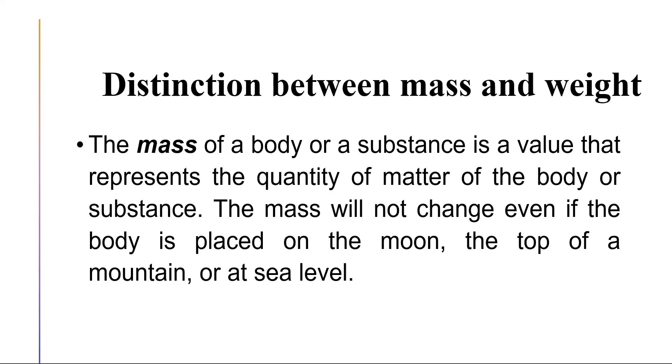The force exerted by this mass when it is subject to the Earth's gravitational attraction is the weight of the body or substance. Since gravitational attraction is variable, it is lower at high altitudes than at sea level. The moon's gravitational attraction is weaker than the Earth's, etc. The weight of a body or a substance will vary according to its location, but its mass will always remain the same.

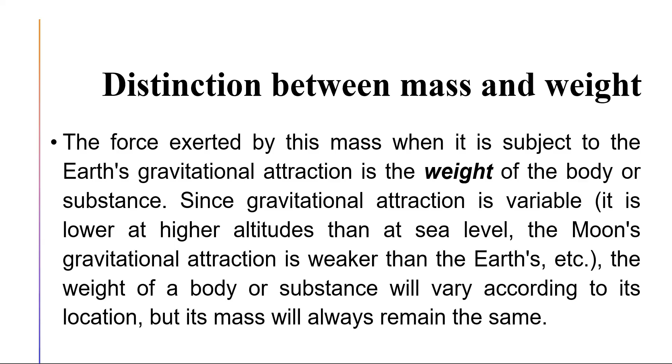The gravitational acceleration of the Earth is approximately 9.81 meters per square second. So weight on Earth is equal to mass times the gravitational acceleration. The unit for weight is supposed to be newtons, or equivalently kilograms meter per square second. But it is often shortened as kilogram, and gravitational attraction is considered as a unit 1.

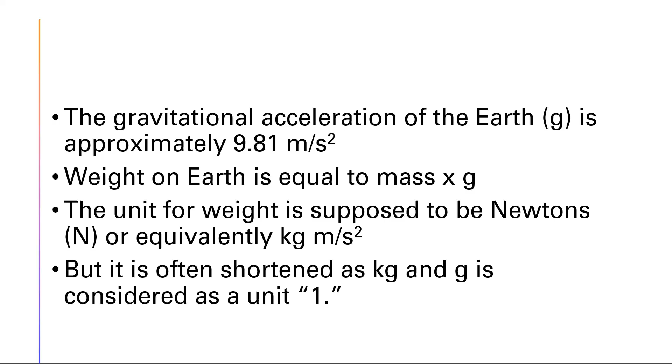That's why on Earth, in non-scientific fields, for example maritime, we consider that 1 kilogram of mass is equal to 1 kilogram of weight. But it is supposed to be 1 kilogram of mass is 9.81 newtons because of the acceleration.

Okay, the formula density is equal to mass over volume. We will use that even on board, not only here in school. And then you can transpose by cross multiplying it. Then it will be density over 1 is equal mass over volume.

Mass is equal, mass times 1 is equal density times volume. Then if we want to find the volume, then we just transpose the formula. Density times volume is equal mass. And then multiply both sides by 1 over density to cancel here, 1 over density. So your volume now is equal to mass over density. So that is how you transpose the formula.

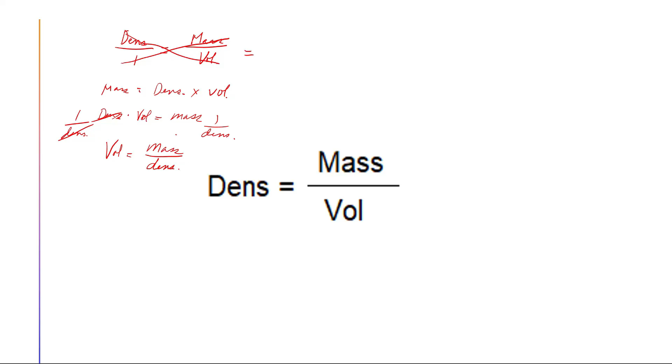Okay, the effect on box-shaped vessels. New mass of water displaced is equal old mass of water displaced. Thus, remember that the mass is equal to volume times density. So the new volume times new density, that is equal to the new mass. Then old volume times old density, that is equal to the old mass.

Then we can derive the new volume over old volume equals old density over new density. So just multiply both sides by 1 over new density, 1 over new density. Then we can cancel. So new volume is equal to old volume times old density over new density.

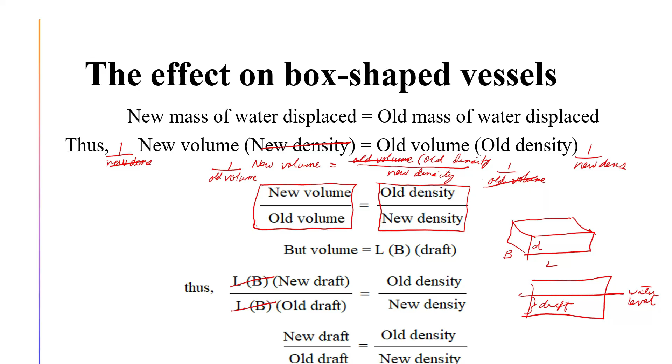Okay, example 1. A box-shaped vessel floats at a mean draft of 2.1 meters in dock water of density 1020 kilograms per cubic meter. Find the mean draft for the same mass displacement in salt water of density 1025 kilograms per cubic meter. So solution, we will use the new draft over old draft is equal to old density over new density.

So you can also use the mnemonic NUN for this. Nun meaning new draft over old draft is equal old density over new density.

Then by transposition or cross multiplication, to transpose, then new draft times new density is equal to old density times old draft. Then multiply both sides by 1 over new density.

Note that the center of buoyancy is the geometric center of the underwater volume, and for a box-shaped vessel it must be at half draft. If this is your vessel and this is the water level, this is your draft. If you draw a line from corner to corner of the submerged portion, the middle will be the center of buoyancy. So remember, KB, the distance from keel to the center of buoyancy, is 1/2 of draft. This is for box-shaped vessels only.

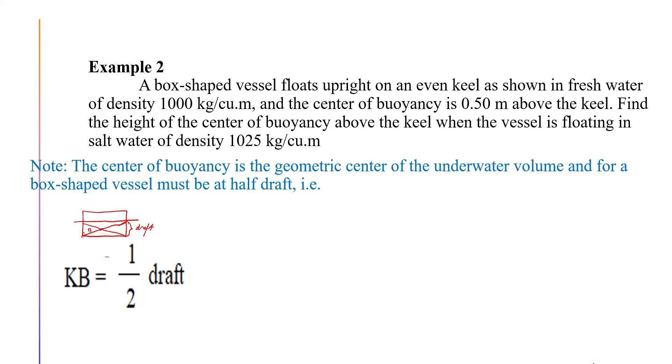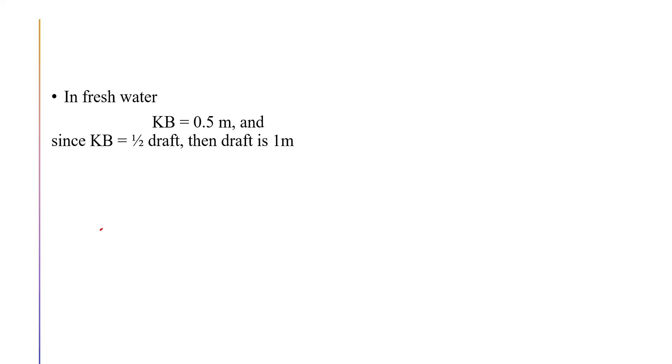In freshwater, KB is 0.5 meters. Since KB is 1/2 of draft, then draft is 1 meter. Going back to the figure, if this is 0.5 meters plus another 0.5 meters, that is 1 meter.

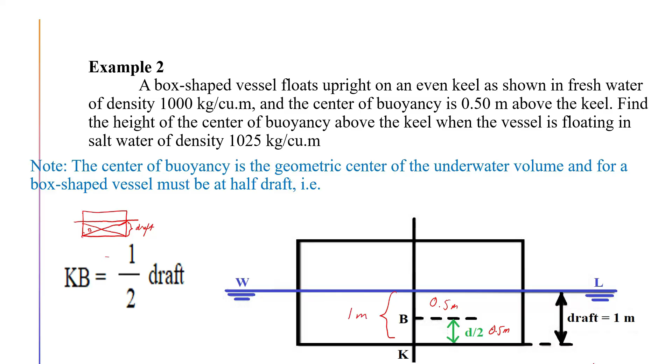Then we apply again the formula: new draft over old draft equals old density over new density. By transposition, new draft becomes old density times old draft divided by new density, because we are looking for the new draft.

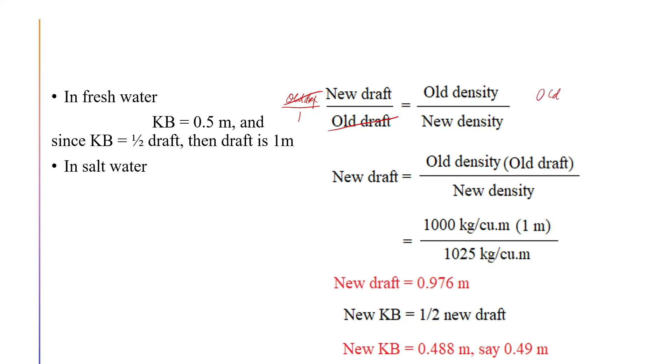There is also a shorter way to transpose this. You can multiply both sides by old draft over 1 so we can cancel, then old draft over 1: 1000 kilograms times 1, divided by 1025, equals 0.976 rounded off.

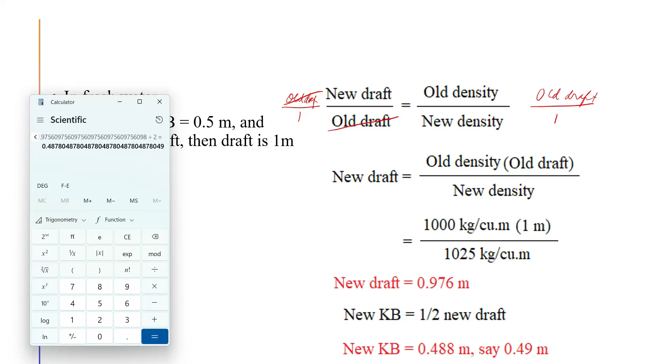Since KB is equal to 1/2 of new draft, the new KB will be just this divided by 2. That is 0.488, or 0.49 meters.

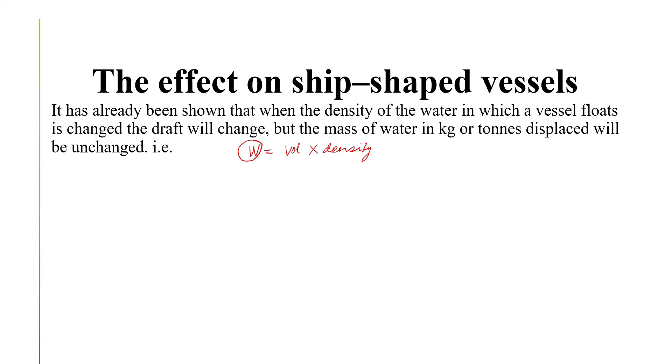It has already been shown that when the density of the water in which a vessel floats is changed, the draft will change, but the mass of water in kilograms or tons displaced will be unchanged. That is, new displacement equals old displacement, or new volume times new density, because displacement is weight. Remember our formula: weight equals volume times density, because we consider weight equal to mass. Then the formula becomes new volume times new density equals old volume times old density.

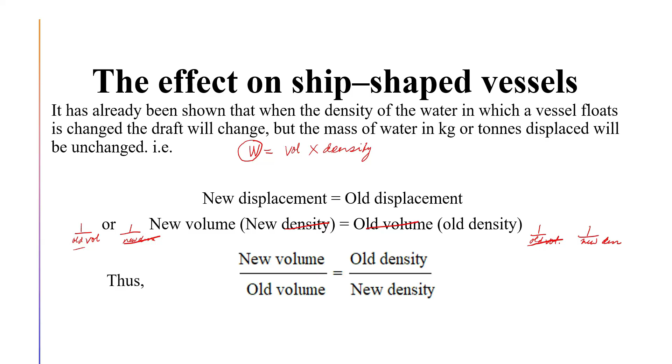By transposition, new volume over old volume equals old density over new density. Just multiply both sides by 1 over new density, and 1 over old volume on both sides. Then we can cancel the new density here, and also cancel the old volume here. So remaining will be new volume over old volume equals old density over new density. This will be the transposed formula.

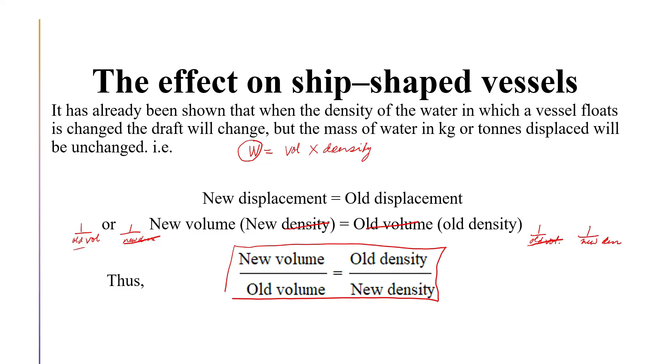With ship shapes, this formula should not be simplified further as it was in the case of a box shape, because the underwater volume is not rectangular. To find the change in draft of a ship shape due to change of density, a quantity known as the freshwater allowance must be known. The freshwater allowance is the number of millimeters by which the mean draft changes when a ship passes from salt water to freshwater or vice versa, whilst floating at the loaded draft.

It is found by the formula: freshwater allowance equals the displacement or weight of the ship divided by 4 times the tons per centimeter immersion. Remember TPC, if you recall from seamanship 2, that is tons per 1 centimeter immersion, and that is for millimeter. Now for centimeter, freshwater allowance is displacement divided by 40 times the TPC. So just remember those formulas.

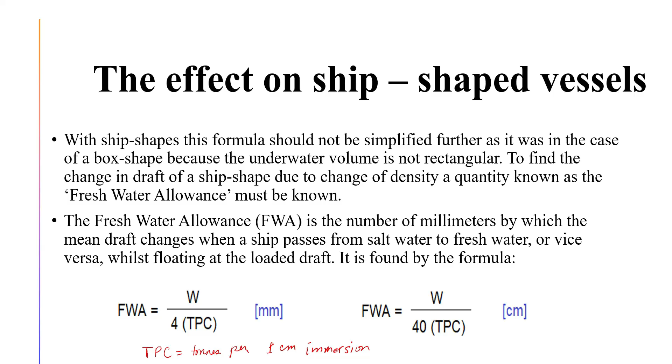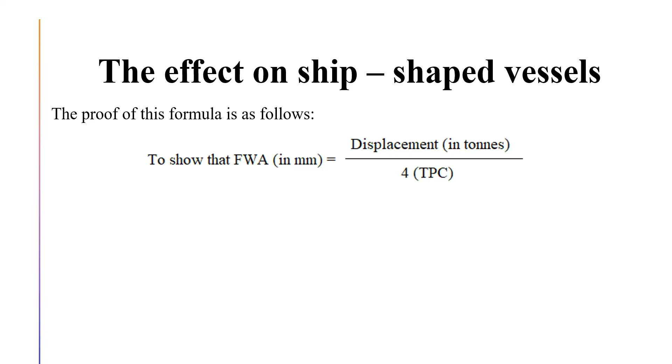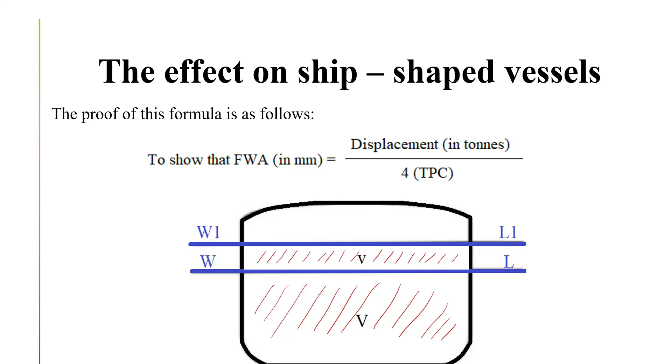So the total volume of freshwater displaced is then the volume of the seawater displaced plus the extra volume, which is represented by small v. Then remember, mass is equal to volume times density. Thus, the mass of seawater displaced is equal to volume times 1025 kilograms per cubic meter. And the mass of freshwater displaced is volume plus extra volume multiplied by 1000 kilograms per cubic meter.

But mass of freshwater displaced is equal to mass of seawater displaced. So your formula will become volume plus extra volume multiplied by 1000 kilograms per cubic meter will be equal to volume of the seawater times the density 1025 kilograms per cubic meter.

Then by distribution, V times 1000 is 1000V. Extra volume times 1000 is 1000 times extra volume, plus 1000 extra volume, is equal to 1025 kilograms per cubic meter times the volume. Now we assume that we already canceled the density, or the units for density.

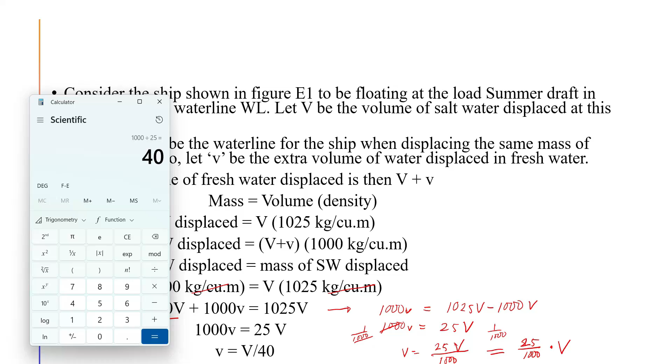So 1000 divided by 25, that is 40. So this will become 1 over 40 times volume, or volume over 40.

Now let small w represent the mass of salt water in volume v, or the extra volume, in tons, and let capital W be the mass of water in volume V in tons. So that is the displacement in salt water.

But remember that the formula for weight is equal to freshwater allowance times TPC divided by 10. Then freshwater allowance times TPC divided by 10 is equal to, that is remember the volume over 40, that is the extra volume. But we consider it as a mass, so this is the weight or the displacement of the ship divided by 40.

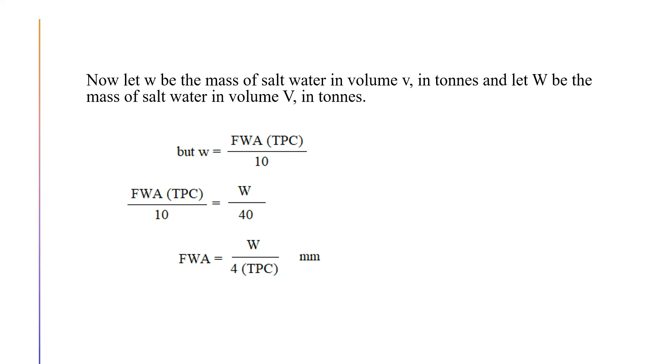Then by transposition, this will become 40 times freshwater allowance times TPC is equal to 10 times the displacement. Then multiply both sides by 1 over 10. Then this will become 4 times freshwater allowance times TPC.

Then cancel, this will become the displacement. Then since we are looking for the freshwater allowance, multiply both sides again by 1 over 4 times TPC. Then we can cancel 4, we can cancel TPC. Then the remaining will be: freshwater allowance is equal to the displacement divided by 4 times TPC.

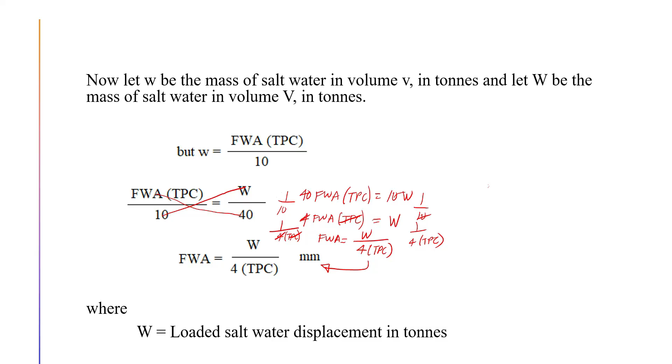So here, W is the loaded saltwater displacement in tons, or that is the displacement of the vessel in salt water. Okay, so this is the load line marks. Those are the measurements you have already learned in other seamanship.

But what we need to learn here is how to measure the freshwater allowance. The freshwater allowance is measured from the summer load line, or the upper edge of the summer load line, up to the upper edge of the freshwater load line, as shown here. This is your summer load line, and this is your freshwater load line.

So if you do not know how to calculate the freshwater allowance, then just take a measuring equipment and measure the distance here on the side of the ship, and that will be your freshwater allowance. Then remember that the freshwater allowance in millimeters is written in our certificates or load line certificate.

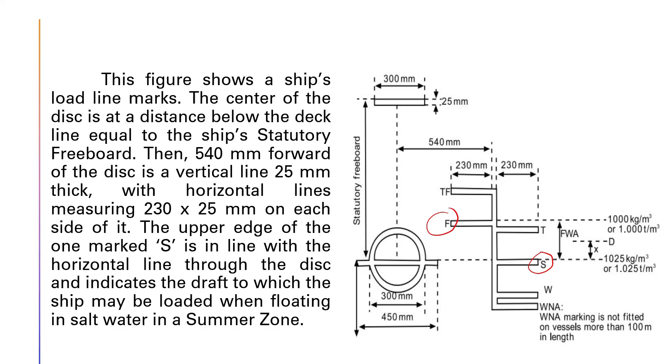Okay, when the ship is loading in dock water, which has a density between these two limits, the summer load line may be submerged at the distance that she will automatically rise to the summer load line when floating in open sea where salt water is reached.

The distance by which the summer load line can be submerged is called dock water allowance, found in practice by simple proportion. Let X be the dock water allowance. Let PDW be the density of the dock water, though in some books it is written only as DW.

Dock water allowance divided by freshwater allowance equals 1025 kilograms minus the dock water density, divided by the difference between seawater density and freshwater density, that is 1025 minus 1000, giving the constant 25. So the formula is: dock water allowance equals freshwater allowance times seawater density minus dock water density, divided by 25.

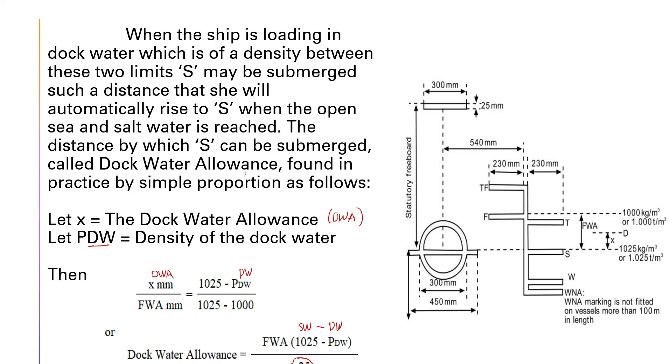The formula becomes: dock water allowance equals seawater density minus dock water density, times freshwater allowance, over 25. Remember this formula. Going back, dock water allowance equals freshwater allowance times seawater density minus dock water density, divided by 25. Using our formula, let's put it here.

Dock water allowance equals seawater density. The freshwater allowance given is 150. So 150 times, using parentheses, 1025 minus the given 1010, divided by 25, equals 90 millimeters.

This means your draft will decrease by 90 millimeters or 9 centimeters. How did you obtain the 9 centimeters? Divide by 10, because 1 centimeter equals 10 millimeters.

Why would draft decrease by 90 millimeters? Because you are coming from dock water, going to seawater. Remember that if your density is higher, then your draft will be lower.

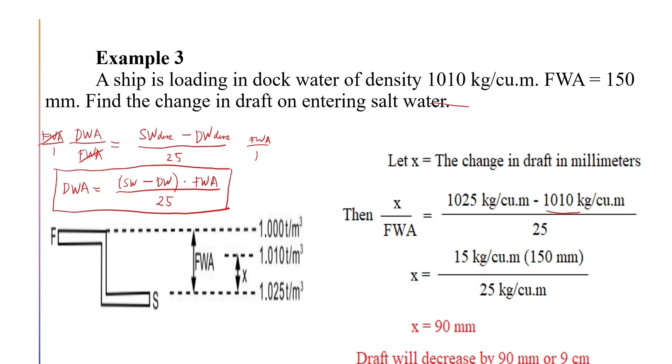Example number 4. A ship is loading in summer zone in dock water of density 1005 kilograms per cubic meter. Freshwater allowance is 62.5 millimeters. TPC is 15 tons. The lower edge of the summer load line is in the water line to port and is 5 centimeters above the water line to starboard. Find how much more cargo may be loaded if the ship is to be at the correct load draft in salt water.

Note the ship is obviously listed to port, and if brought upright, the lower edge of the summer load line on each side would be 25 millimeters above the water line. Also, it is the upper edge of the line which indicates the summer load draft, and since the line is 25 millimeters thick, the ship's draft must be increased by 50 millimeters to bring her to the summer load line in dock water. In addition, the summer load line may be submerged by the dock water allowance in millimeters, or X in millimeters.

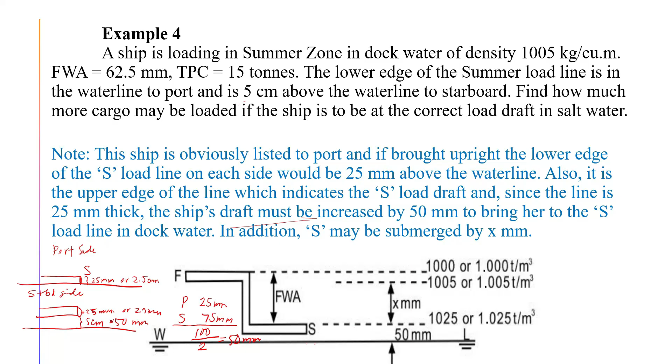Just try to analyze the problem. Remember our formula: dock water allowance equals freshwater allowance times seawater density minus dock water density, divided by 25. Then we can go to this formula, which is your dock water allowance.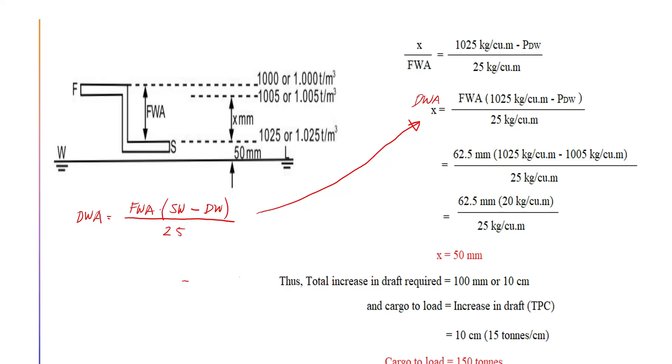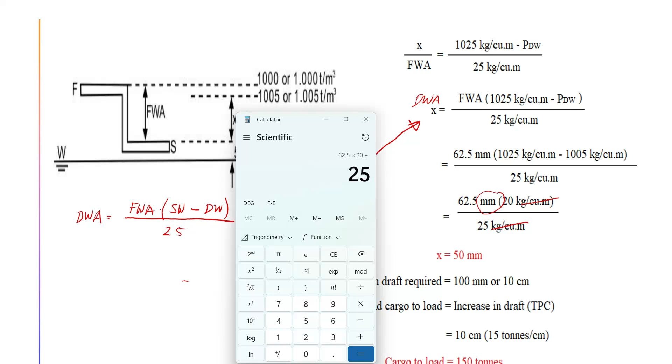So 62.5 millimeters times 1025 kilograms per cubic meter minus 1005 kilograms per cubic meter, divided by 25 kilograms per cubic meter. We can cancel the units so the remaining unit is millimeters. Using the calculator: 62.5 times 20 divided by 25 equals 50 millimeters. The total increase in draft required is 100 millimeters or 10 centimeters.

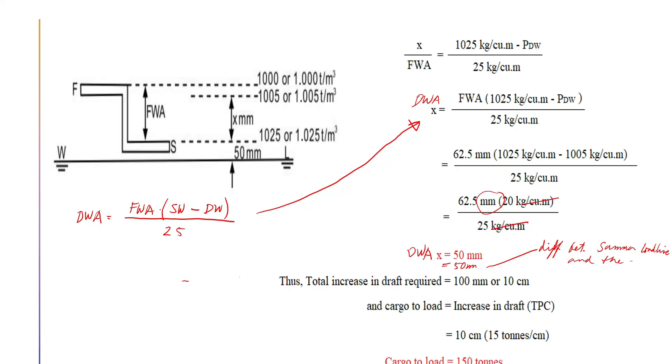So where do we get the 100? This is your dock water allowance. Remember that we have a difference of draft of 50. This is the difference between summer load line and the draft in dock water. So 50 plus 50 is 100 millimeters or 10 centimeters.

Then cargo to load is increase in draft times TPC. That is 10 centimeters. Remember that we convert the millimeter to centimeter because we are using the TPC, and TPC is ton per centimeter immersion. So 10 centimeters is 15 tons per centimeter. Then we can cancel the centimeters, and remaining will be tons. So cargo to load is 10 times 15 is 150 tons.

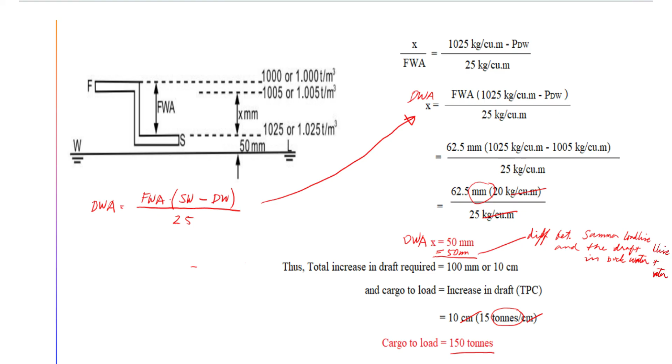Example number 5. Your vessel is expecting to load cargo in a port of USA. The water density in that port is 1.000 tons per cubic meter, that is fresh water. The ship's displacement is 16,000 tons and the TPC is 45 tons per centimeter. Remember, TPC, when you take it from the tables, will give you only the tons, but it is actually tons per centimeter, as the name itself, tons per centimeter.

So that is 45 tons per centimeter. What will be the deduction in your vessel's freeboard in that port? Just apply the formula. Freshwater allowance is displacement divided by 4 times TPC. Then 16,000 tons displacement divided by 4 times 45, which is the TPC, that is 16,000 divided by 180, is 88.89 millimeters. Or you can calculate it also in centimeters. Conclusion: the freshwater allowance is affected by the density, in as much as TPC is affected by density. Moreover, sailing from seawater to freshwater will have changes in density of 0.025 tons per cubic meter.

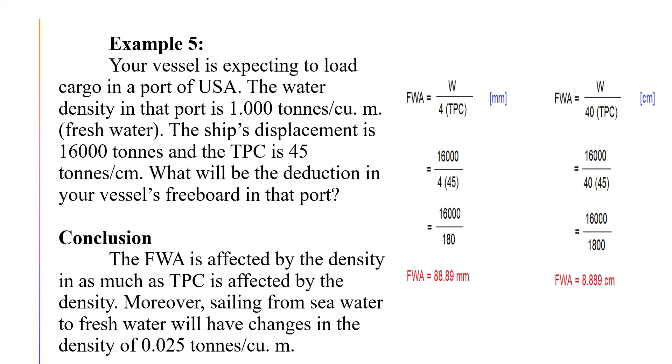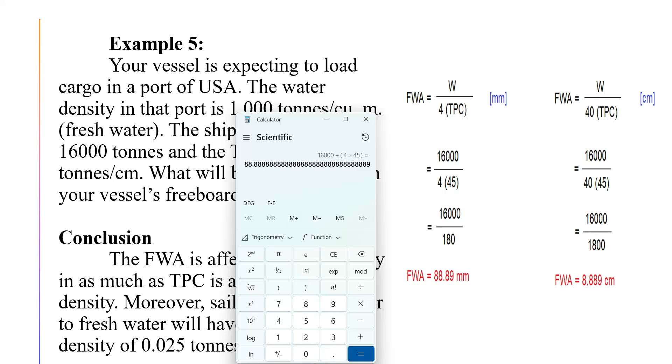16,000 tons divided by parentheses 4 times 45 equals 88.888. Effects of density on displacement when the draft is constant.

Should the density of water in which a ship floats be changed without the ship altering her draft, then the mass of water displaced must have changed. The change in the mass of water displaced may have been brought about by bunkers and stores being loaded or consumed during the sea passage, or by cargo being loaded or discharged. In all cases, new volume of water displaced is equal to old volume of water displaced.

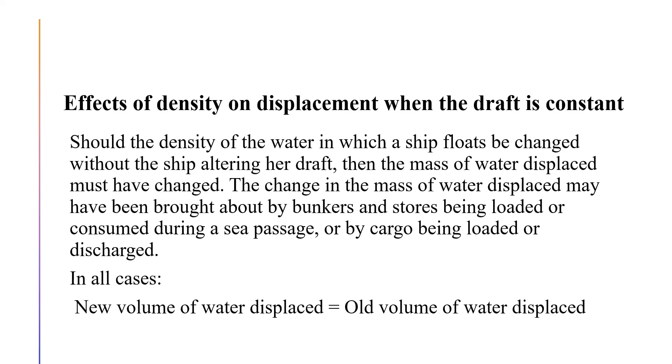So that is our formula. If we go back, new volume of water displaced is equal to old volume of water displaced. Let us derive the formula. New volume of water displaced is equal to old volume of water displaced. And since new volume is equal to displacement over density, we use new displacement over new density, and old displacement over old density. Then we can transpose the formula.

By multiplying both sides by 1 over old displacement and new density over 1, and then on the other side, 1 over old displacement and new density over 1, we can cancel the old displacement here, and then we can cancel the new density here. Then we will obtain new displacement over old displacement is equal to new density over old density.

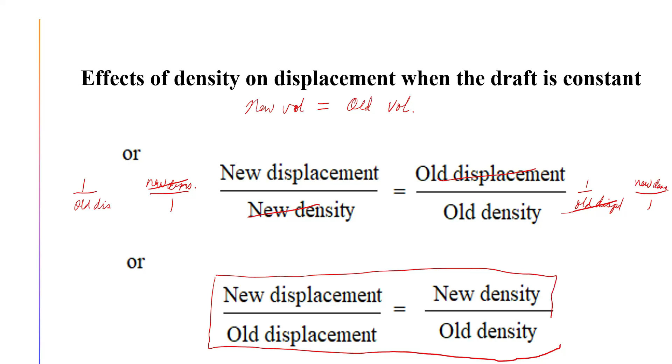Example number 1. A ship displaces 7,000 tons whilst floating in fresh water. Find the displacement of the ship when floating at the same draft in water of density 1,015 kilograms per cubic meter, that is 1.015 tons per cubic meter. By applying the formula, new displacement over old displacement is equal to new density over old density, then cross multiply.

That is new displacement times old density is equal to old displacement times new density. Multiply both sides by 1 over old density. Then we obtain the new displacement, so here it is. New displacement is equal to, because we need to cancel this, new displacement is equal to old displacement times new density over old density.

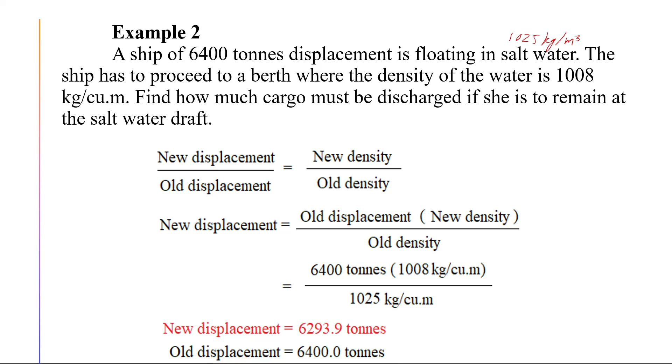Applying the formula, new displacement over old displacement is equal to new density over old density, and by transposition, we get new displacement is equal to old displacement times new density over old density. Then 6,400, let's use the calculator: 6,400 times 1,008 divided by 1,025 equals 6,293.85, rounded off to 6,293.9.

Then subtract the 6,400, which is the old displacement. Then cargo to discharge is 106.1 tons or metric tons. So as you can see here, this is negative, it means to discharge.

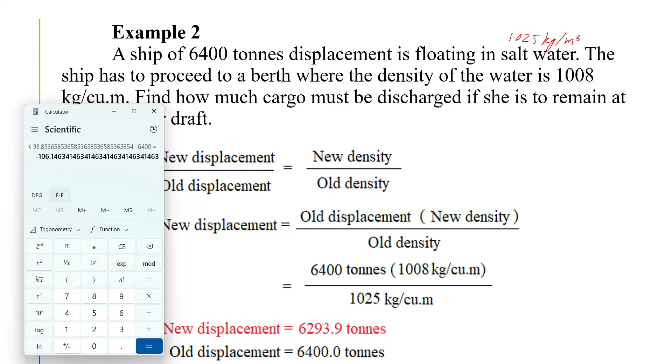Example number 3. A ship of 120 meters by 17 meters by 10 meters has a block coefficient of 0.8 and is floating at a load summer draft of 7.2 meters in fresh water. Find how much cargo can be loaded to remain at the same draft in salt water. Note, this problem should not be attempted as one involving TPC in fresh water.

So the formula for displacement is length times beam times draft times CB times density. Just apply the formula.

120 meters times 17 meters times 7.2 meters times CB, remember CB has no unit because it is a ratio, times 0.8 equals 11,750.4, which will be cubic meters, where we will cancel here.

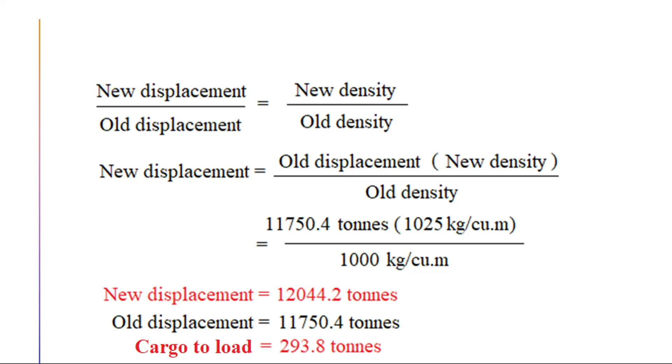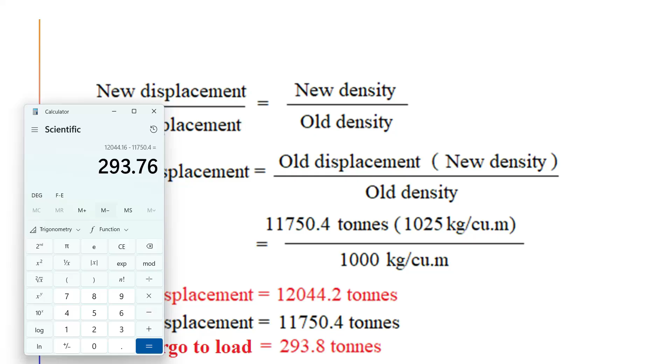Using the calculator, multiply this by 1025 and then divide it by 1000 equals 12,044.2 tons. Then subtract the old displacement, which we calculated earlier as 11,750.4. This is positive, so this is cargo to load: 293.76 tons, as you can see.

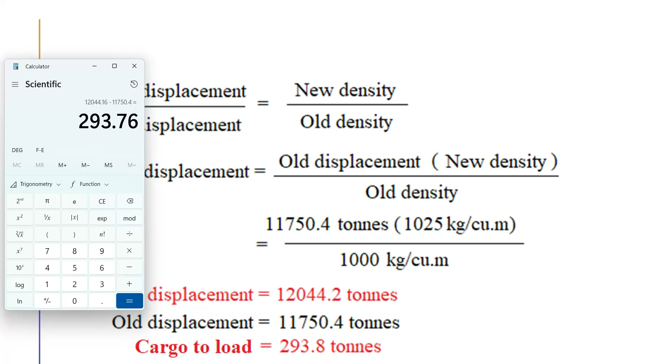So remember that if negative, that is cargo to discharge. If positive, that is cargo to load.

Tons per centimeter. So what is TPC? TPC is tons per centimeter immersion, or tons per 1 centimeter immersion. It is the number of tons necessary to change the mean draft of a vessel by 1 centimeter, and it varies with draft.

It is directly proportional to the density and water plane area. Inasmuch as the underwater shape and the draft affect the water plane area, it means that it is also directly proportional to underwater shape and draft. You can also find the TPC in the hydrostatic table on board the ship.

The formula: TPC is equal to water plane area times density divided by 100. This is equal to length times beam times CB times density divided by 100.

What does the formula indicate? It indicates that your water plane area, we will not calculate using Simpson's rule, but there is already a block coefficient that we can use. This is your length, this is your beam, and if you remember the block coefficient from your seamanship 2, that is the ratio of the box enclosing the ship shape. That's why we can use the formula: water plane area is length times beam times CB.

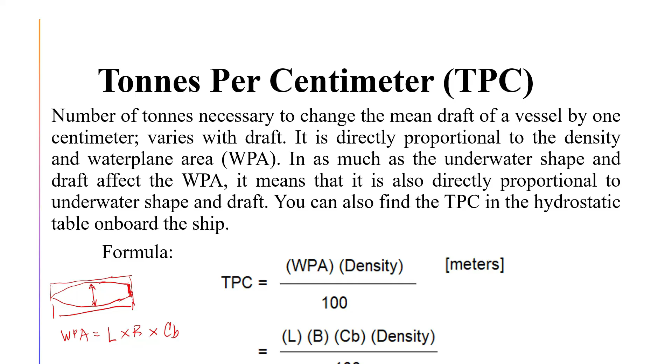Example 1. The ship is sailing in brackish water with a density of 1.015 tons per cubic meter. Her length is 180 meters, breadth is 30 meters, and block coefficient of 0.75. What is the TPC of the ship?

By applying the formula, TPC: length, your length is 180 meters, times 30 meters, times CB. I mean, length times beam. Yes, length times beam.

So this is square meters. When we cancel here and there, 1 meter will remain because this is square meters. So your units will be tons per meter.

Use the calculator again. 180 times 30 equals 5,400 square meters, times CB equals 4,050, times the density 1.015, then divided by 100 equals 41.1075 tons per centimeter.

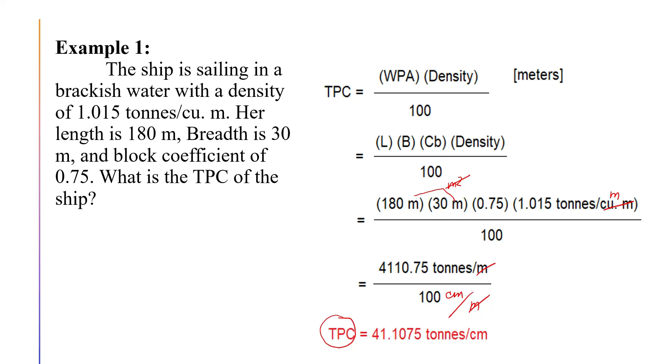From the latter problem, we will calculate the TPC of the ship using the same ship's particulars but with a density of fresh water, which is 1.000 or 1.0 tons per cubic meter.

Conclusion: the density of the water where the ship is floating affects the TPC thereof.